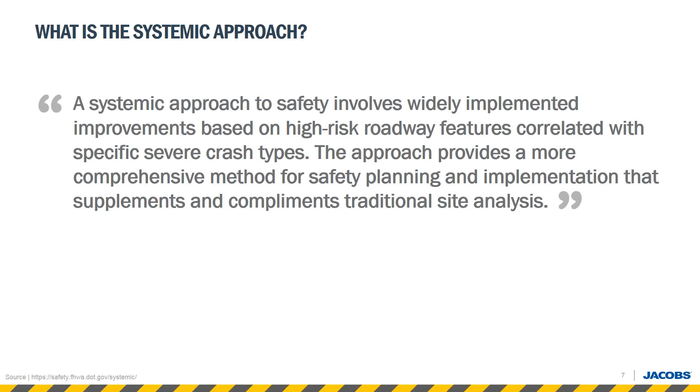What is the systemic approach? This is a really long definition from the Federal Highway website, and I'm not going to read it. Even when I do read it, it takes a long time to process. So we're going to simplify it a little bit and just say it's a data-driven process that identifies safety performance candidates based on risk. So we've got two terms highlighted there.

The first is the data-driven process, and because it's data-driven, it's repeatable. And I think there's not a preconceived notion of what the solution is, and the data drives us to the solution. So that's really why that's important.

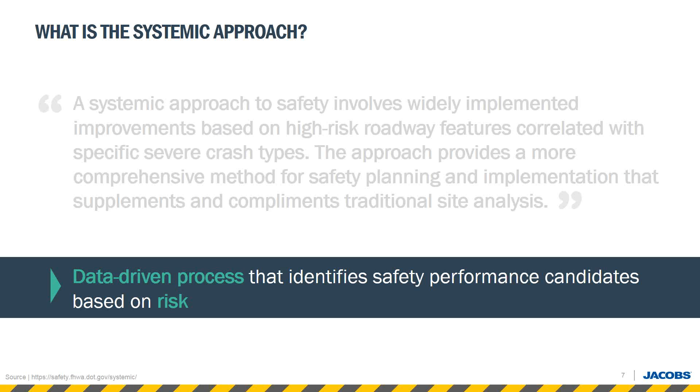Risk, I think risk is a concept we deal with in our everyday life, but we don't necessarily think of roadways and highway and safety performance in terms of risk that often. And that's one of the things that this process does a very good job of, that kind of differentiates it in some ways from some of the other methodologies that are out there from a safety perspective. So we'll focus some time on that and explain the concepts, which really takes the historical crash analysis we've probably all done before and takes it one step further to identifying the locations with most risk.

Just briefly, a little bit on our experience. So we, as a company, pioneered this process in conjunction with the Minnesota DOT. There was no name for it. It was a couple of folks from both sides who had back and forth over a period of time and just had some ideas, and it turned out to be something that was pretty effective.

We've analyzed 65,000 plus centerline miles of roadway, a bunch of intersections, a bunch of horizontal curves. We've developed the FHWA systemic toolbox that's online on the Federal Highway website, and we've developed a case study specifically for the use of this process and bike and ped crash types.

A couple of unique benefits to the approach. As I mentioned before, this is a proactive approach, and we don't have a whole lot of those, so the potential to treat crashes before they occur is pretty unique and interesting.

The deliverables, we'll talk about those a little bit later, but one of the things you get is a big, long list of site-specific projects, which is different than some of the other type of work we do, where maybe we identify countermeasures that are generic in nature, but we don't necessarily pinpoint those to specific locations to implement them. Or if we do, it's a small list, whereas with this process, you get a huge long list of hundreds or thousands of projects that are typically low-cost countermeasures that can be applied to these high-risk locations.

Some terminology. You'll probably hear Robert and I say systemic approach or systemic safety or systemic process. We're using those interchangeably, so try not to get hung up on one or the other. We're really intending the same thing. With that said, you may also hear people talk about systematic safety, and I think in some cases people use that interchangeably, but they are a little bit different. So we're talking specifically about systemic and not systematic here.

One other terminology thing related to systemic is we've seen the term systemic used with multiple definitions, and the way we're talking about it in this presentation is we're using risk to identify the locations that are most in need of countermeasures. We've also heard of people just applying a low-cost countermeasure to all the intersections or something like that. So that's the differentiator, is risk. We're using risk to try to find a minority of the network where we can address a majority of the crashes.

Local road safety plan and county road safety plan, you'll hear us talk about those. That's really the deliverable that results from going through a systemic analysis. So just understand that those are basically the same thing, but this is just the deliverable of the process.

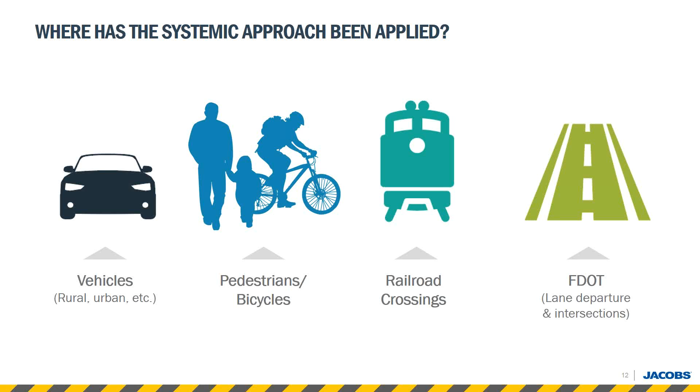So this kind of is trying to set up the challenge, and you're going to hear us talk a lot about Minnesota throughout this presentation. That's because Minnesota is the location where we've done the most of this. We've used this process for all 87 counties in Minnesota, and there's been some good results. And then we're actually going through a second round of it now for all 87 counties again, where we're taking a deeper dive. So we acknowledge there are jurisdictional differences between Florida and Minnesota, absolutely, but please keep in mind that this process works in both jurisdictions. We have complete confidence in that.

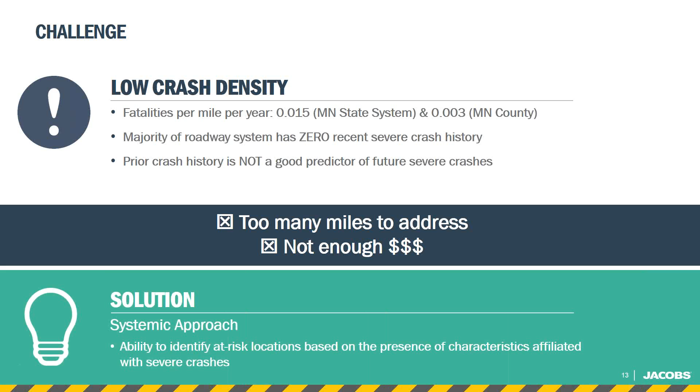So anyway, I bring that up just because there's some Minnesota numbers in this slide. But if you look at the Minnesota state system, the fatalities per mile per year, it's really low. And so trying to identify locations that have crashes can be challenging when the majority of the road network has 0 recent severe crash history. So kind of boiling that down and consolidating it, we have too many miles to address, and we just simply don't have enough money to address them. So enter this approach. This is, once again, one tool to consider for your toolbox to help chip away at this problem we all face.

So I'm going to turn it over to Robert. Robert's going to give an overview, as we mentioned, of just general safety within the state of Florida and some of the numbers from the Strategic Highway Safety Plan. And then he's going to start and get a little bit into the workflow slide.

So what I'm going to talk about now is just basically a lot of regurgitated information from Florida's Strategic Safety Plan. And so let's just dive right in here. So this is a page taken directly from the SHSP. It's just a time series of the number of serious injuries and fatalities from 2011 through 2016. A couple things to notice here is that the trend for serious injuries seems to be fairly flat throughout the 6 years of data that we have. The other thing to point out is that the number of fatalities, while it remains pretty flat from 2011 through 2013, you start to see a fairly substantial increase from 2014 and beyond. And so this is just kind of the current state of where we're at.

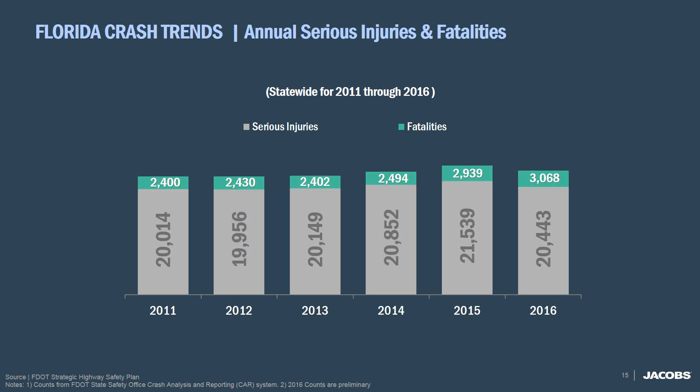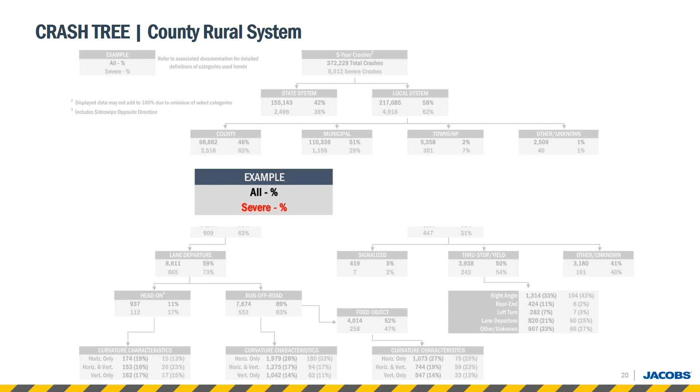So the first step in the systemic process is we want to take a look at the crash data. We develop a crash tree. In this example, any of the text in black is all crashes, and any of the text in red is severe crashes, with a percent to the right of it. There's a lot going on here. I'm not going to walk through every single one of these, but essentially you start at the very top and you work your way down.

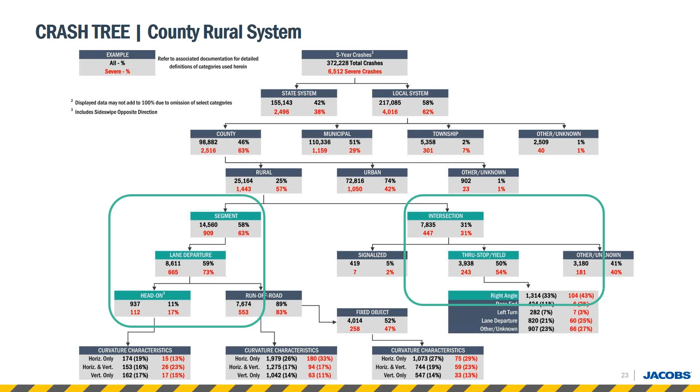As you work your way down, you branch off into different jurisdictions and different environments. Essentially you're breaking up crashes into homogeneous types of crashes. You want to be comparing apples to apples. What I've highlighted here is we separated out segment and intersection related crashes on the rural system. One of the reasons we separate them is because the crash types are so different, and the countermeasures we would suggest for these locations are different in nature as well.

If we look at the right side, breaking down the intersection related crashes, we have found that approximately 33% of the right angle crashes occur at through stop or through yield controlled intersections. Looking at right angle crashes in particular, it's 43% of the severe right angle crashes, and that's an overrepresented proportion compared to the total number of crashes. So here's that concept of overrepresentation again, where we're able to identify where there's a majority of severe crashes.

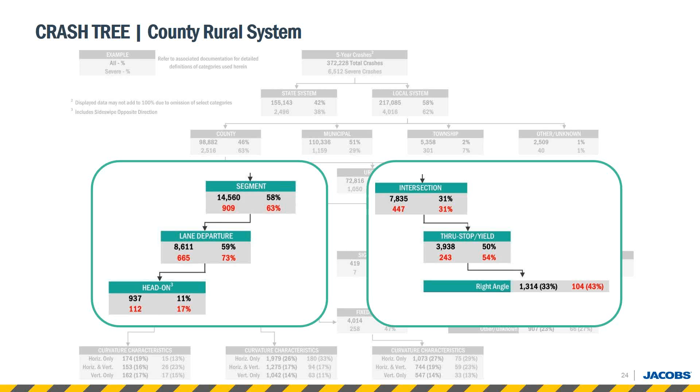Since the performance measure that FDOT uses is severe crashes, severe being fatal or incapacitating injuries, that's what we want to focus on. Similarly on the segment side, on the left side of your screen, 17% of your severe head-on crashes are a subset of your lane departure crashes along your segments.

So I'm going to pass it back over to Chad for now, and the next slide here is just going to be a risk example, kind of setting up the playing field for risk.

So I mentioned this concept of risk and how this really differentiates systemic versus some of the other approaches we use in the safety realm. And I'm going to walk through an example here. If this were a live audience, I would ask for answers, but I'm going to walk through kind of the typical response we get to some of these questions. And we're using this example to try to paint the picture of risk and how we can use risk to help improve our safety performance on a road network.

So if you had a two-lane undivided roadway that had a rural typical section and a design speed of 50 miles per hour, and you were looking at a horizontal curve, the FDM would tell you that the minimum radius that you can use is 716 feet. And that if you use that minimum radius, you need to have a superelevation, the banking of the road, of 10%, which is the maximum we can use.

So if we have two curves, curve 1 and curve 2, and curve 1 has a radius of 500 feet, that's well below the minimum radius that's allowed, so you would need to get a design variation or potentially an exception. This is already in place, so it has a superelevation value of 8%. And then you were looking at curve number 2, which is similar but a little bit different, and has a radius of 550 and an E value of 8.5%.

If I were to ask, is one safer than the other, this usually causes people to pause a little bit, but ultimately the response that we most consistently get is that curve 2 is safer, and the reasoning behind that is that the radius is closer to that nominal value from the FDM, and the superelevation is closer.

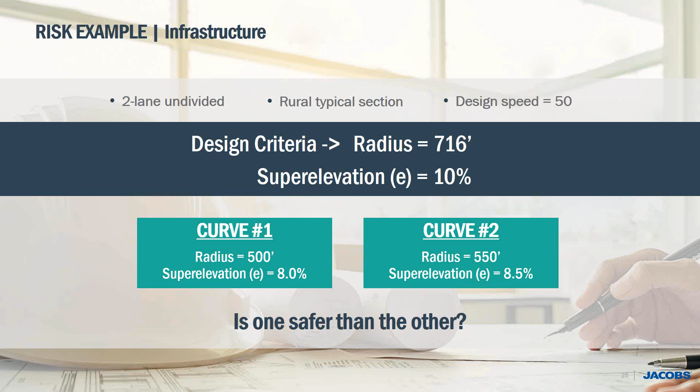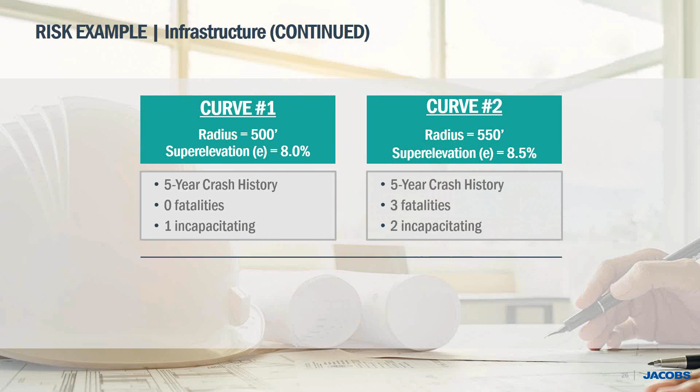So then we kind of peel one more layer of this onion off, and we say, okay, well, if we now told you that curve number 1, over the 5-year crash history, had 0 fatalities and 1 incapacitating, so 1 severe crash, but curve number 2 over the same period of time had 3 fatalities and 2 incapacitating, and we ask you the same question, the answer is going to change, right? Because clearly on curve 2 over the last 5 years, the safety performance has been significantly worse than that on curve 1. So let me backtrack.

So up to this point is a pretty traditional historical crash analysis that we've all probably undergone. But I think this is the point at which we take that extra step and start talking about risk. So the next question becomes, which one has more risk? And even though curve 2 over 5 years may have had more severe crashes, if you were to consider the risk profile of both of these curves, they're both pretty risky. They both have significantly lower radii values than we're required to have, and they both have below superelevation values.

So if you think about the risk moving forward, 5 years is good information for us to use, but if you looked at this over 50 years, would the larger sample size cause the number of severe crashes to become closer to equivalent between these two? And I think it very easily could be that curve number 1 and curve number 2 could flip in the next 5 years. And maybe you have 4 or 5 severes on curve number 1, and you have 1 or 2 or 0 or whatever on curve number 2.

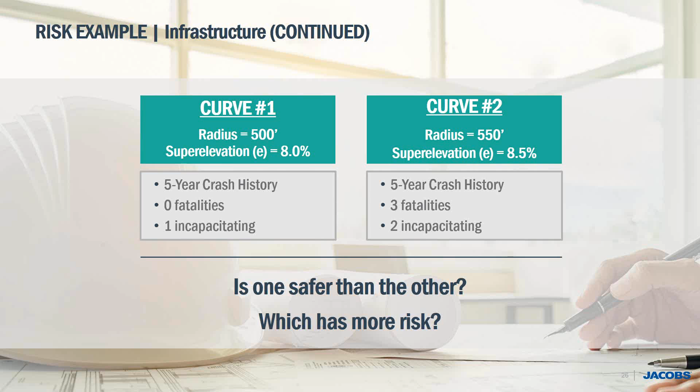And I guess finishing up the human health discussion, we don't just treat the people who have the heart attacks. We want to identify the risk elements, and we want to give them blood pressure medicine or whatever it is ahead of time. So a unique way to approach roadways is this concept of risk, and how can we identify the risk even if that 5-year crash history doesn't show it, and proactively treat those locations.

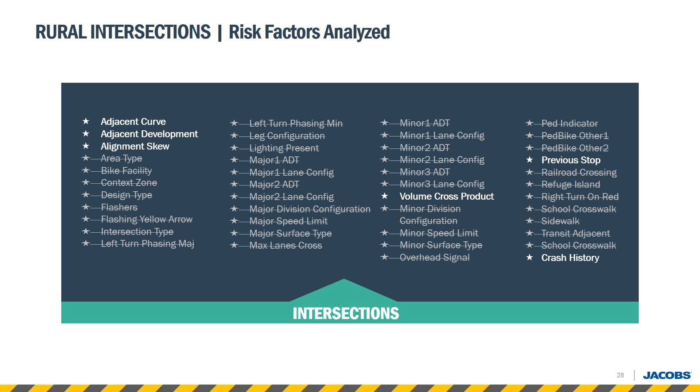So once we identify 5 or 6 or 10 or however many risk factors, we then, using the same information we used to identify the actual risk factors in the screening process earlier on, identify a threshold above which the safety performance begins to severely degrade. In the analysis we just showed, when the skew angle of an intersection got to 10 degrees, that's when the safety performance really started to go down. So we take these risk factors and the tolerances, that tipping point where safety starts to go down.

We take a big step back and proactively analyze all the intersections or segments or curves, in this case intersections. We go intersection by intersection, and every one that has a skew angle of 10 degrees or higher gets a star, meaning it triggered that risk factor. For the volume cross product, when it was 400,000 or more, we gave a star for that. And we do that for all of these risk factors that we've identified.

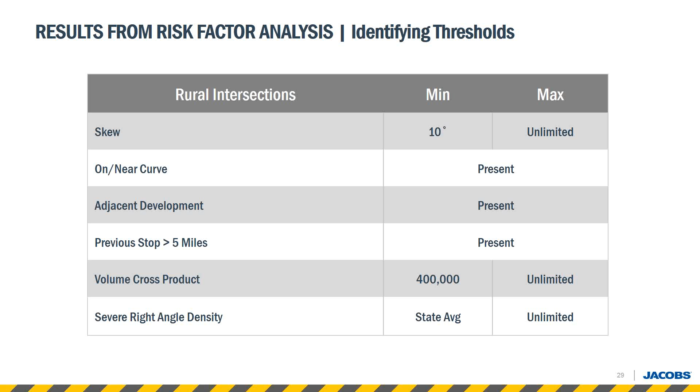And we invite law enforcement, we invite the 4 E's, we invite politicians, and we walk through this, we walk through the process, we walk through the results, we walk through the risk factors we've identified, and it's a day-long workshop, and the purpose is really to achieve stakeholder input and buy-in.

And I think this is where earlier on, when I was saying that this is a very transparent process, this is one of the points where it becomes really important, because you may have people in the room that don't deal with safety every day, and it helps when, as we walk through this, it's transparent and it makes sense; it helps to get their buy-in. So anyway, that's an important part of this process.

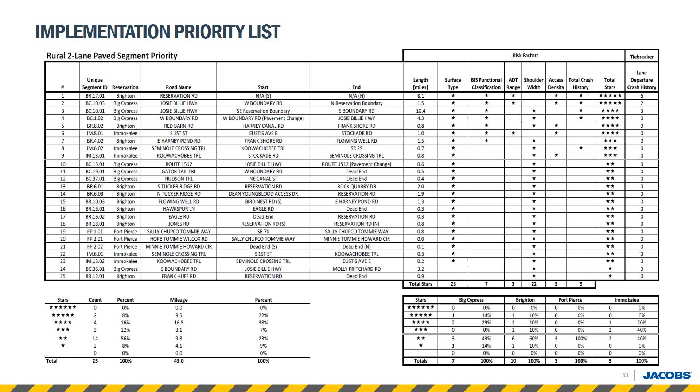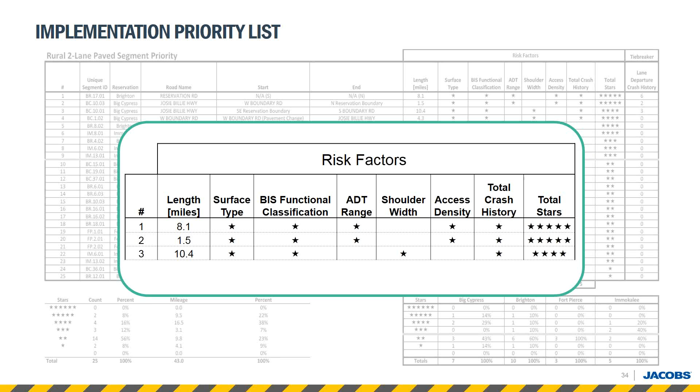So we identify these candidate locations for projects, and then we begin the start of this prioritized list based on the risk that is present at each one of these locations, and then we work to identify countermeasures. And we largely try to focus on low-cost countermeasures. However, if there are some areas that have really high crash densities, we will sometimes include mid-range or more costly countermeasures in that list.

We include the cost of the countermeasure and the effectiveness when we bring this to the client so that they can be informed, and we work with them to make sure that they're happy with these countermeasures. Sometimes we find that there's a particular countermeasure that a jurisdiction or an agency has tried to implement but hasn't had success with, so we'll throw that one out if that's what they want to do.

And here's just one example. So sticking with the segments, for rural segments, just picking one strategy was centerline rumble strip. The crash reduction factor is 40%, so the CMF is 0.6, and the typical installation cost for the one we were working on was about $3,600 per mile. So we use those countermeasures and apply those to the sites, the candidate locations, and that's how we identify actual site-specific projects that we recommend for implementation.

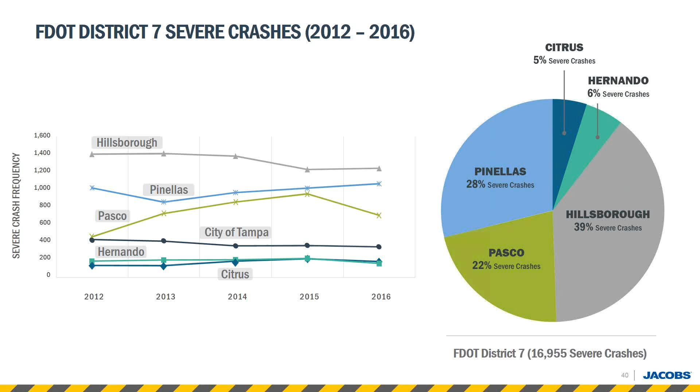So we're here in Tampa in District 7. So let's start the process from the beginning, looking at what's going on in District 7. This is severe crashes from 2012 through 2016, broken down into each of the counties here in the district. Hillsborough County, no surprise, has the majority of the severe crashes. There's a lot of people that live here, and so from that data, we also start.

I'm just going to look at Pinellas County, focusing in on this. What we can see here is that 56% of their severe crashes occur at intersections compared to non-intersections. And I think Pinellas County is one of the most densely populated counties in the state. So based on the characteristics and the analyses that we've done, it almost makes sense that the majority of severe crashes would occur at intersections in a very densely populated area.

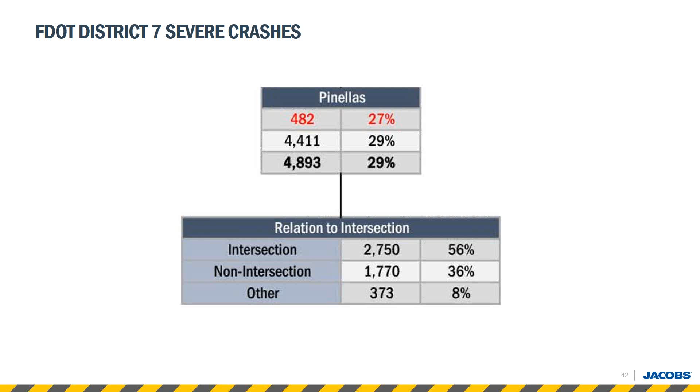And so if we take a closer look at District 7 in the different counties, we see this concept of overrepresentation again and underrepresentation for Citrus and Hernando, but Pinellas County and Hillsborough County and Pasco County, for that matter, are all overrepresented for severe ped bike crashes compared to the system. And this is just some data that I was curious enough to download from SSO-GIS, and so you can go and create the same graph if you choose to as well.

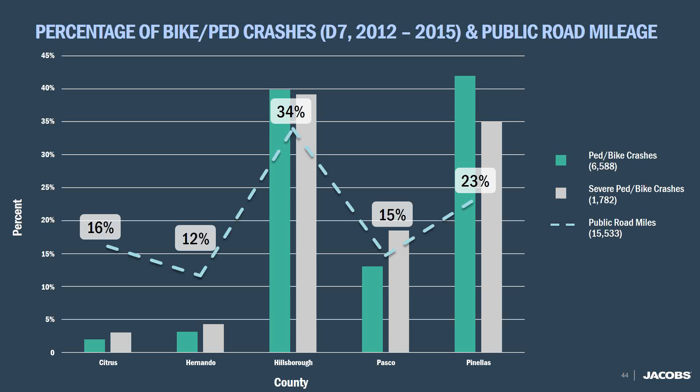And so a couple other just quick facts about ped bikes. So a bullet from the ped bike page in the Strategic Highway Safety Plan is that while Florida has only 6% of the U.S. population, it unfortunately accounts for 17% of the bicycle fatalities and 11% of the pedestrian fatalities.

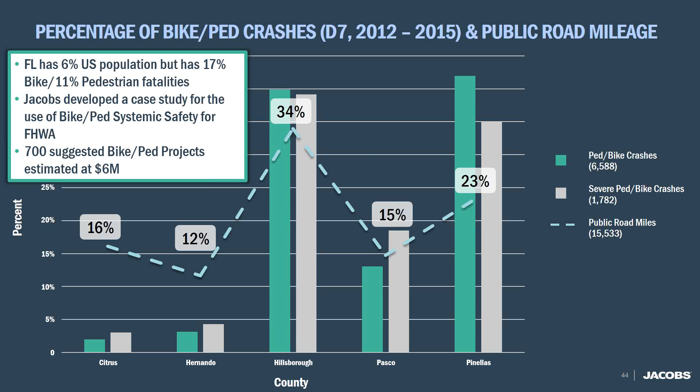And I think Chad mentioned before that Jacobs developed a case study for a ped bike systemic safety study for FHWA, and in those county road safety plans from Minnesota, we were able to look at an urban environment and suggest over 700 ped bike specific projects at an estimated implementation cost of around $6 million. And so in any kind of environment, with any data availability issues, we've always been able to come to some meaningful conclusion and statistically reliable results, regardless of the jurisdiction or built environment.

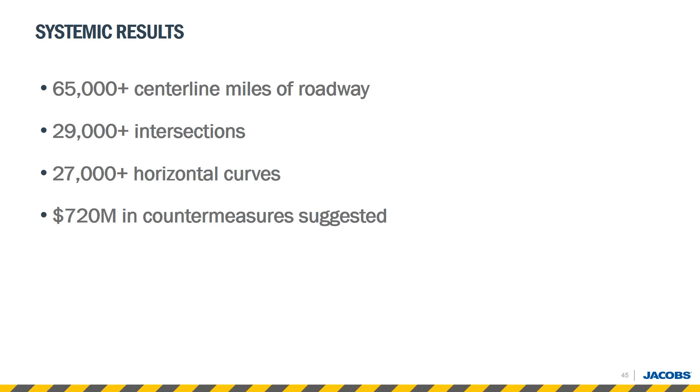And so speaking of these results, like we said before, we've looked at over 65,000 centerline miles of road, almost 30,000 intersections, 30,000 curves, and with all the analyses that we've done, we've accumulated a rough estimate of about $720 million worth of suggested countermeasures to the different agencies for them to deploy. And obviously, that's going to take a long time to implement every single one of those. But the beauty about this process is that it's a prioritized list. So if you start from the top of your list, you're going to be addressing the majority of the crashes at the minority of your system. And so it's a good thing here.

So other deliverables and benefits from this systemic approach is the agency will get an agency-specific plan catered to them. We work really closely with whatever agency, and if they want this included or that excluded, we'll do it. And so then there's increased success in applying for HSIP funding. Like I mentioned, the local feedback has been really positive, and a location prioritization of countermeasure recommendations and this defensible project list is just key. And the other component of it is really involving the 4 E's of traffic safety and getting that stakeholder engagement and that local buy-in.

We started with a quote, and so we're going to end with a quote by really famous basketball coach John Wooden. Failure is not fatal, but failure to change might be.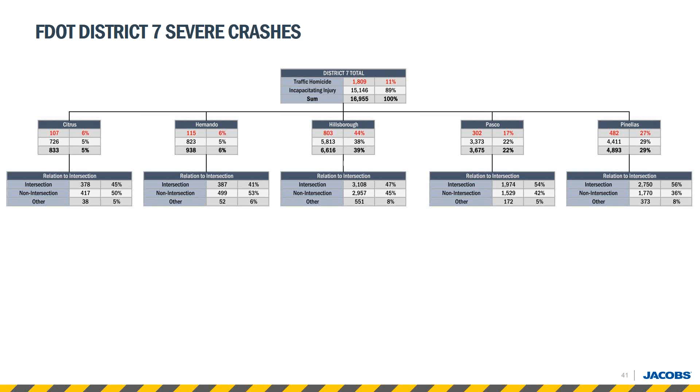Yes. Honestly, when it comes to implementation, because really that's the key thing here is really finding the right projects for the right locations and actually implementing them. And so some of the biggest hurdles that happen early on is data availability. The hurdle maybe later after the technical analysis is the selection of particular countermeasures.

Sometimes there are certain politicians or the public saying like, hey, we don't like this, we don't like shoulder rumble strips or whatever because it's noisy and we don't want it outside of our house or something. And so you have to try to get that buy-in and really engaging locals and engaging stakeholders as well. So that's the second one.

And then the third hurdle could very well be, just at the state's discretion or following in accordance with the FAST Act or any sort of national legislation, how to actually get it funded and using this process as a vehicle to get that project funded. And I would add on to that last one. I think there's an upfront challenge, and I have a large appreciation for it, as much as I can without having been in the position. But I think,